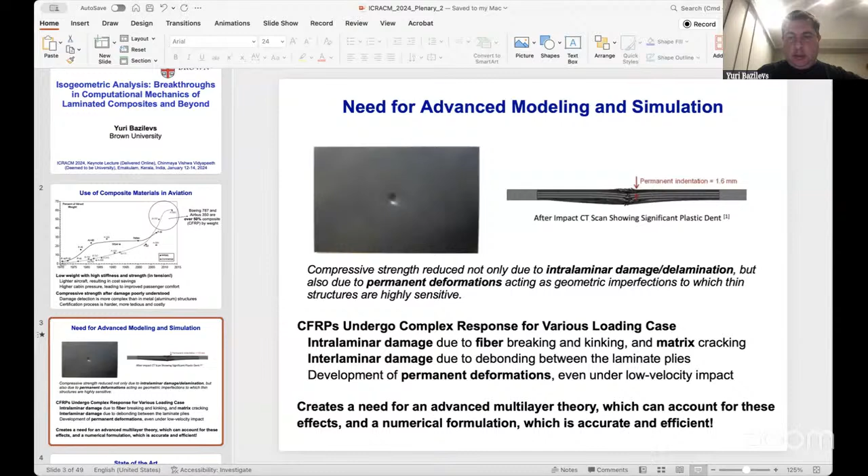Here we go. Okay, this is better. Yes, it is coming. Yeah, you can go. Okay, great.

Okay, so let me go back to this graphic. It's really just to motivate the fact that at this point, over 50% of structural weight of aircraft like a Boeing 787 or Airbus 350 are CFRPs.

So what's so attractive? Of course, we're looking at the low weight, high stiffness ratio, and strength. But in compression, the behavior is a lot more complicated.

So what it does: composite aircraft, you get a lighter aircraft, resulting in cost savings when it comes to fuel use. Another benefit that people really appreciate is that you can have higher cabin pressure, leading to improved passenger comfort.

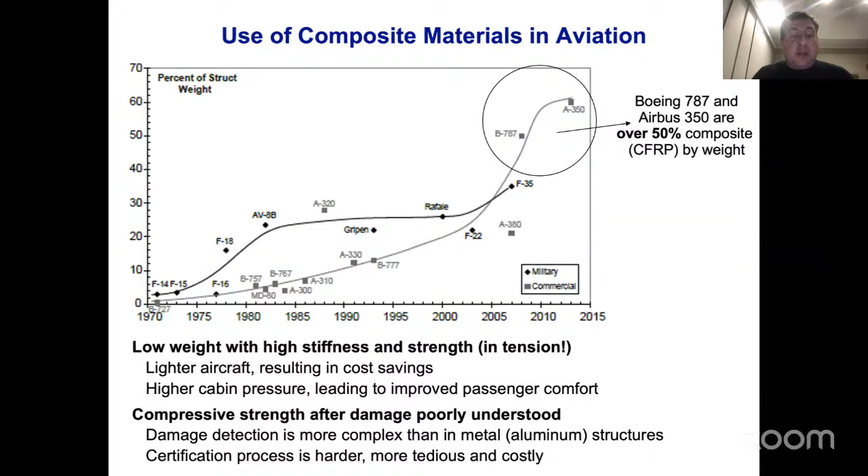However, compressive strength after damage is poorly understood, and as a result, damage detection becomes more complex than in, let's say, metal or aluminum aircraft structures. The certification process itself is harder, more tedious, and costly, and so it does create a need for advanced modeling and simulation for this class of problems.

When we look at CFRPs, they undergo complex response for various loading cases: intralaminar damage due to fiber breaking and kinking, matrix cracking, interlaminar damage or delamination due to debonding between the laminate plies. Another aspect that's perhaps not so appreciated is the development of permanent deformations, a kind of plastic-like response, even under low velocity impact.

So if you look at things like compressive strength, it's reduced not only due to the intralaminar damage or delamination that occurs during impact type events, but also due to permanent deformations that act as geometric imperfections to which thin structures are highly sensitive.

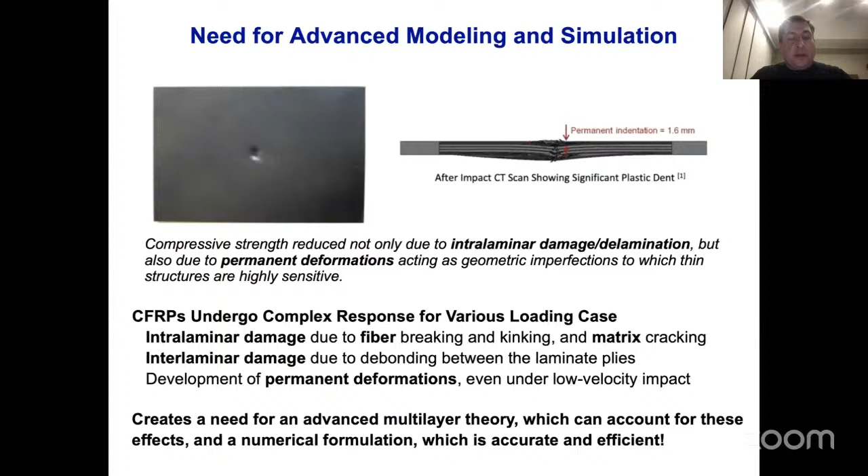So all of this creates a need for an advanced multi-layer theory which can account for these effects, and the corresponding numerical formulation that's accurate and efficient.

So if we focus on the state of the art: typically, a given structure or laminate is broken up into the different lamina. They're connected by cohesive interfaces, and oftentimes, to save costs, you do things like ply grouping.

When it comes to computational approaches, what's prevalent today is the use of finite element methods that either use linear hexes, using the notation of Abaqus type elements, or solid-like shells on each ply. But if you carefully look at this technology, you see that these are susceptible to what's called transverse shear locking, especially in the thin shell limit, where each ply becomes very thin.

You get fairly inaccurate stresses due to lower order approximation that's involved. These are only piecewise linear finite elements, so you get stresses that are only constant on each individual element.

In explicit calculations, which are often done for impact events, you get small time step sizes, coming from stable time step restrictions because of high stiffness and low mass. Also, when you start looking at curved structures, you need high element count just to represent the curved geometry and resolve the stresses in these regions.

So even if you want to do an impact on a coupon consisting of 8 to 16, perhaps 24 plies, you're looking at meshes that are on the order of 500,000 to 1 million nodes. Imagine 3 displacement degrees of freedom at each node, and you're looking at something that's 3 million for a simple coupon just to get things right.

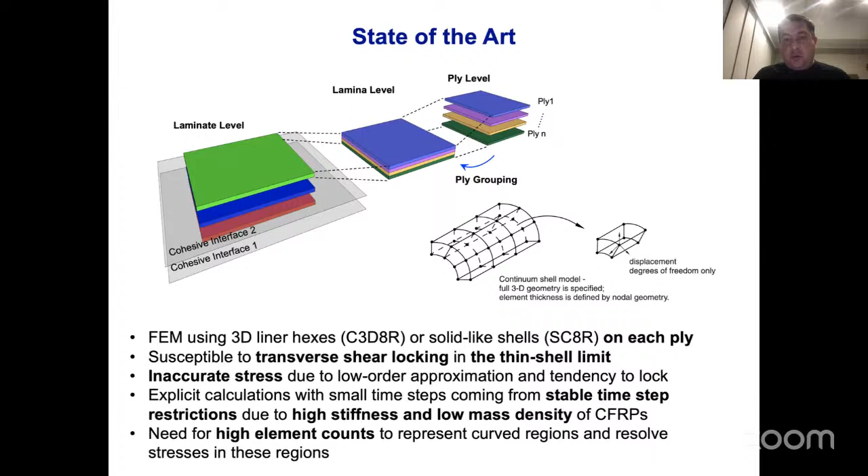This is something that we proposed a few years ago, Professor Hughes and another colleague at the University of Texas. The first paper appeared in the fall of 2005. The underlying technology is based on technologies like NURBS, T-splines coming from computational geometry. And so what we call the resulting modeling methodology is isogeometric analysis, coming from the Greek word iso, meaning equal, and geometry.

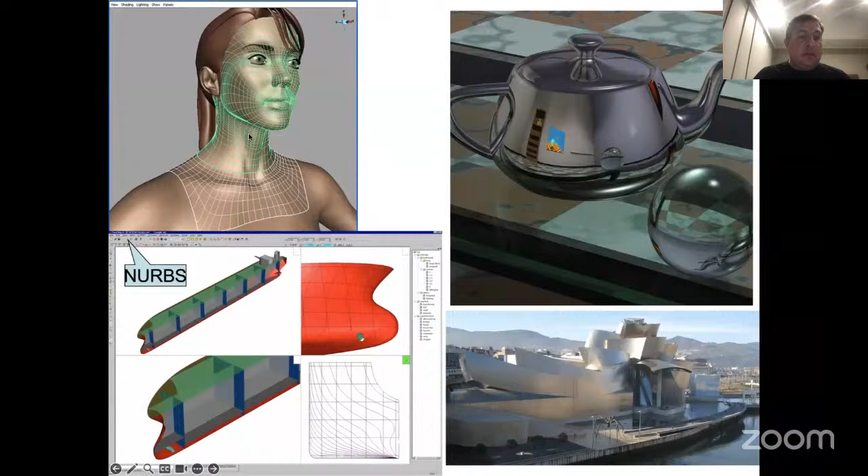So what do we mean? We take the objects that are represented like this in CAD systems using splines, and we're using the exact same spline functions to represent solutions over these objects, for things like displacement fields, temperature fields, and so forth.

So one way to think about isogeometric analysis is you have exact geometry as defined by your CAD system, where you design these objects, in combination with the isoparametric concept of FEM, meaning you're going to use the same functional description for geometry and for the solution field designed over that geometry.

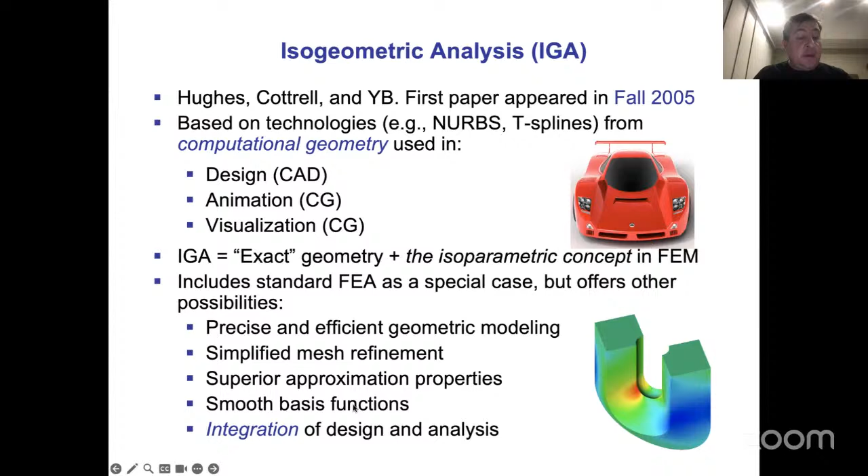Isogeometric analysis includes standard finite elements as a special case, but it offers exciting possibilities, such as precise and efficient geometry modeling, simplified mesh refinement, very nice approximation properties, and basis functions that are smooth between the elements, which we're going to take advantage of. And the community works towards integrating design and analysis.

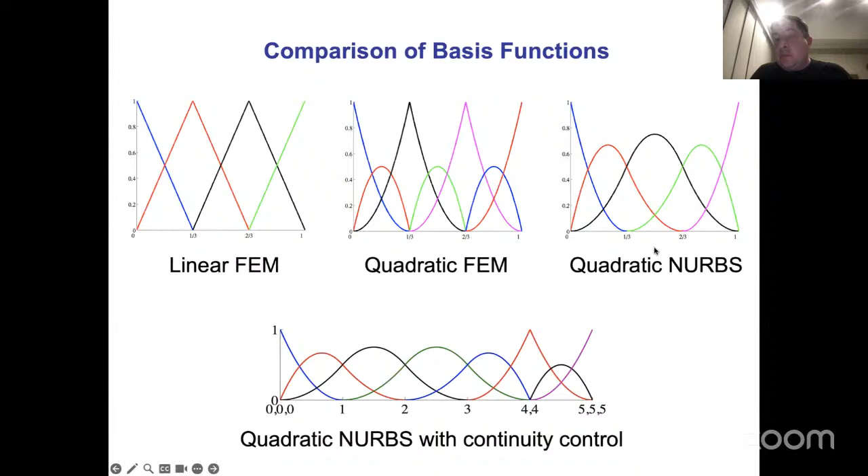Now what you also can do is bring in objects—all the conic sections like circles, cylinders, and so forth. For example, it takes 3 nodes, or what we call control points, to represent a piece of a circular arc of arbitrary angle.

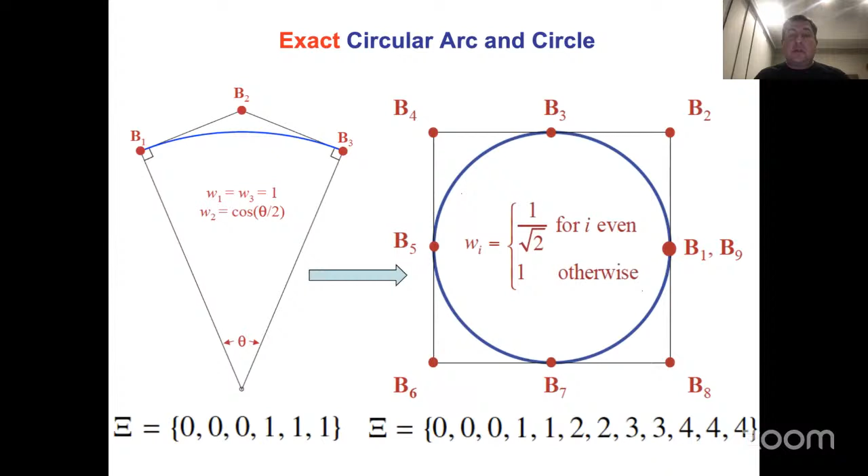And if you want a complete circle, all you need is 8 nodes to represent it. Imagine how many linear elements you would need to get the same accuracy in geometry representation. So I think there are real benefits to be had in computational analysis.

Now when you think of CAD, there's a lot of very well-developed surface technology—you can very quickly build complicated surfaces. As a result, in advances in computational mechanics, isogeometric analysis has impacted many different areas: solids, fluids, electromagnetics, and so forth. There's been quite a bit of new work, I'd even say a renaissance, occurring in the field of shells.

This is what I'd like to take advantage of for composite materials applications. So let me briefly take you through some of our recent work on Kirchhoff shells, which forms the basis of what I'll show you later. Here we imagine structures much thinner in 1 dimension than in the remaining 2, and representation of such a structure can be obtained as follows.

You get a structural mid-surface, which is given here, and then you parametrize the mid-surface. Then you extend it in the thickness direction by h, halfway up and halfway down, in the direction of the normal, which you compute directly from the representation of your surface.

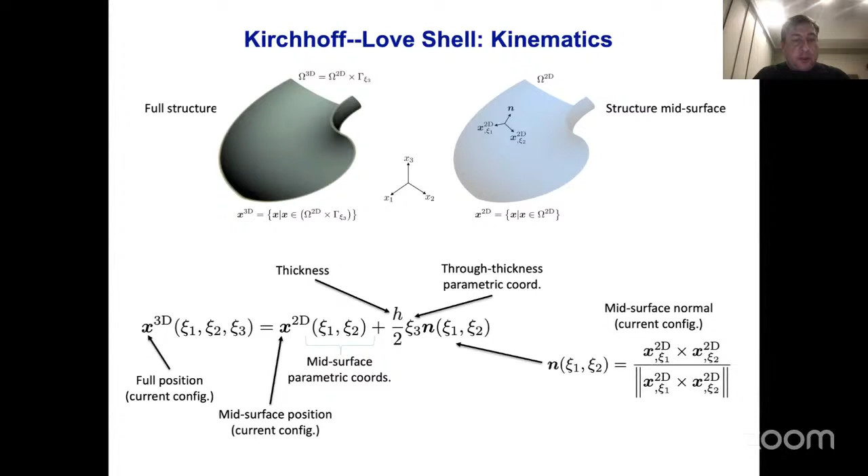So the entire 3-dimensional object's parametrization makes use only of the parametrization of the mid-surface and the position vector on the mid-surface. You can think of this as a parametrization, but also as a current configuration of your structure as it moves through space during a deformation process. Now that you have that description, you can think about mechanical analysis.

You can think of computing stresses, for example, from a given constitutive relationship. There you use a measure of deformation, a strain rate. How do you compute a strain rate? You need to take a velocity field, take its gradient with respect to current position, and symmetrize it. Look at the definition of the spatial velocity gradient, which is given here.

You can decompose it into two parts by applying the product rule: it's a parametric gradient of the velocity multiplied by the inverse of the parametric gradient of the position. This is where you hook up with the Kirchhoff shell, using the expression derived in the previous slide to get the parametric gradient of the position.

So you can expand it here, and you end up getting a parametric gradient of the mid-surface. You need to differentiate through the normal vector, and the normal vector is defined here, so you start looking at second derivatives now. This is sort of a price to pay—you can't use traditional finite elements, but you need functions that have second derivatives.

Like splines. Then you can develop a velocity vector by taking a Lagrangian time derivative of the position, and again you have the velocity of the mid-surface and the rate of change of the normal. Once you have the expression for the velocity, you can develop its parametric gradients, and now you have a complete description of the strain rate, consistent with the Kirchhoff-Love shell theory.

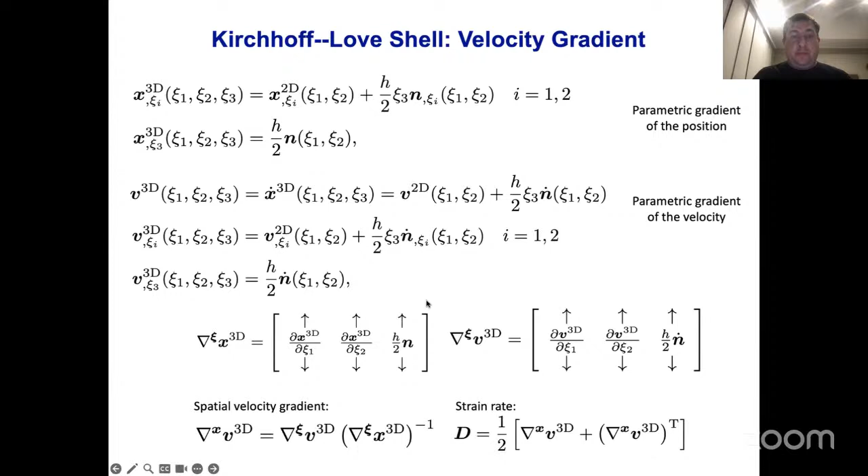The rest of the formulation looks like what you would do in traditional finite elements. You use a principle of virtual work, principle of virtual power. These are the acceleration terms, these are the stress terms, these are the body forces and surface tractions. For your accelerations and virtual velocities, or test functions, you employ expressions consistent with the Kirchhoff-Love theory. So it's really a full three-dimensional solid formulation where the kinematics is restricted to Kirchhoff shells.

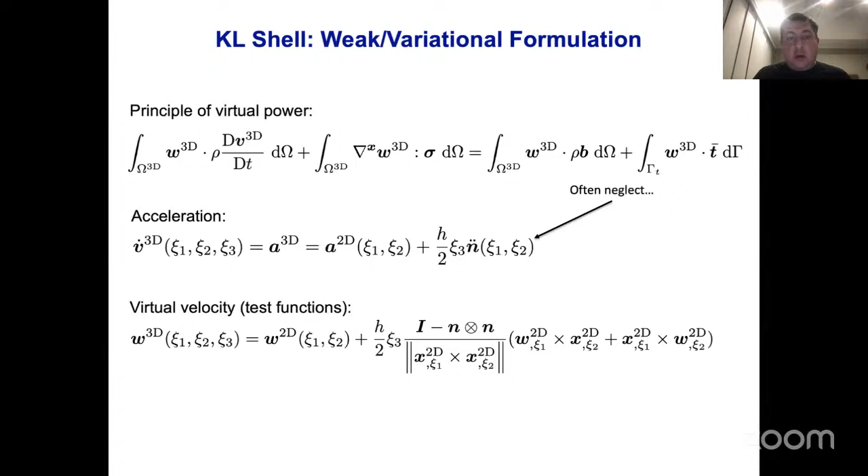Now you go from the continuous to the discrete by using spline functions like B-splines, NURBS, or unstructured variants like T-splines. You parameterize the mid-surface in the current configuration, compute the velocity, and introduce these expressions into the weak form you developed here. You end up with a standard Galerkin approach of finite elements, recognizing the acceleration terms, body forces, surface tractions, and nodal forces coming from the internal stress terms. Sigma here is the Cauchy stress, and B is this velocity gradient or strain displacement matrix that you see in traditional finite elements, but again consistent with the Kirchhoff-Love theory.

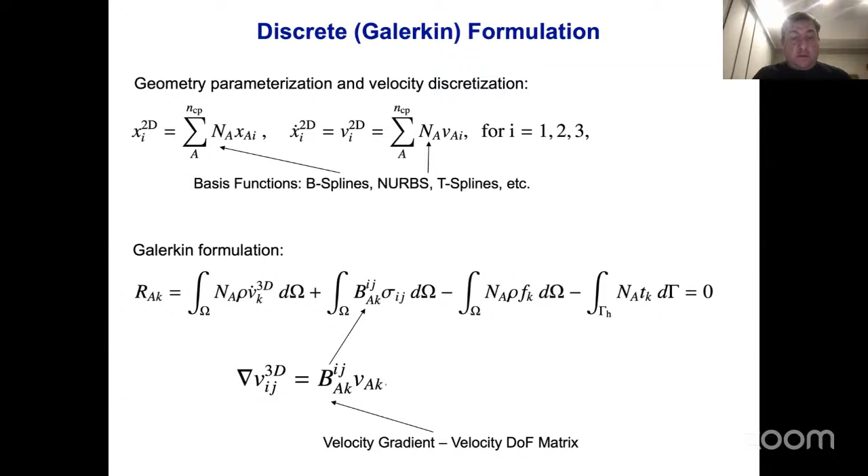If you look at this slide, the expression for the strain displacement matrix looks absolutely unpalatable, but you derive it once and for all, you program it, and you have a method.

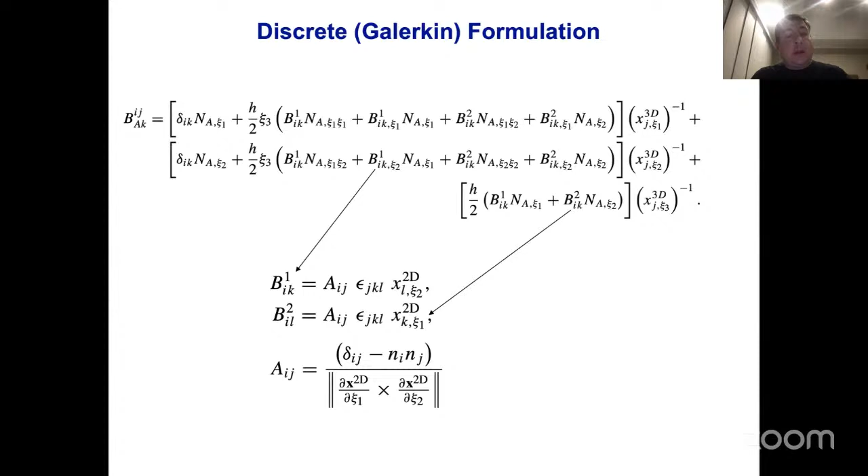So let's see how this works. We're going to take a square tube and crush it. You see that it collapses in the accordion mode. Most of the plasticity occurs right at this edge here, at the right angle, and you can see that the accordion mode is similar to what you see in the experiments.

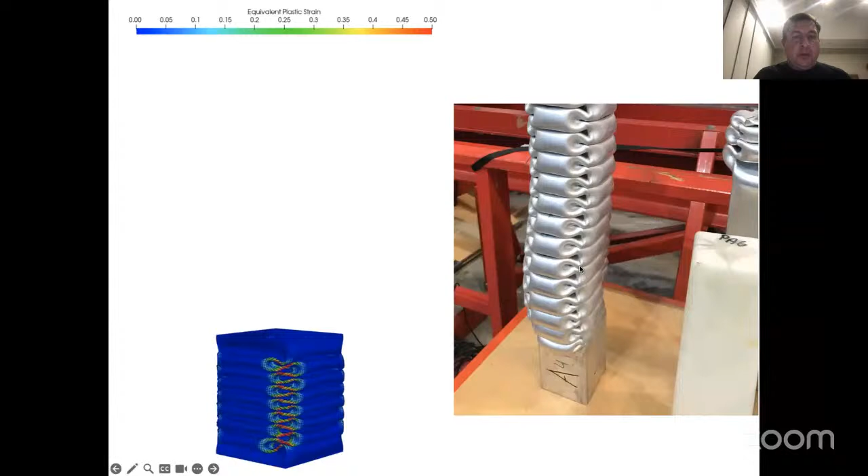This is another problem we did. We took a soda can, measured it—it's very thin, the thickness is a fraction of a millimeter. Problems like this drive commercial solvers crazy, and we're going to crush it and twist it at the same time at a very high rate.

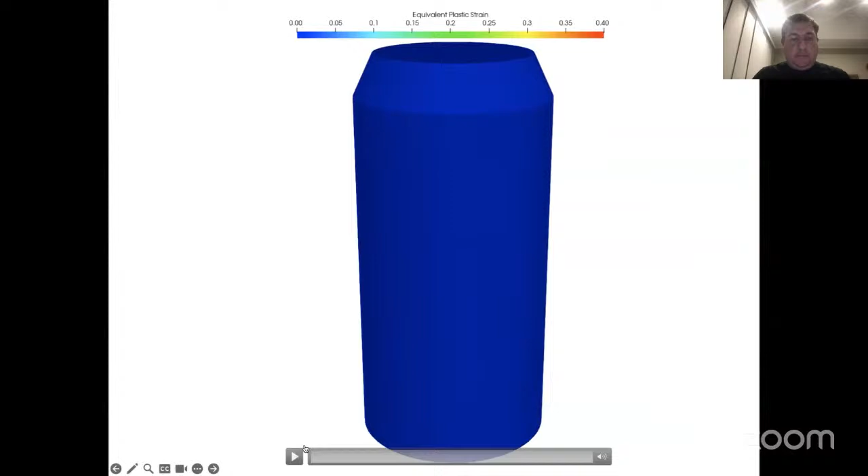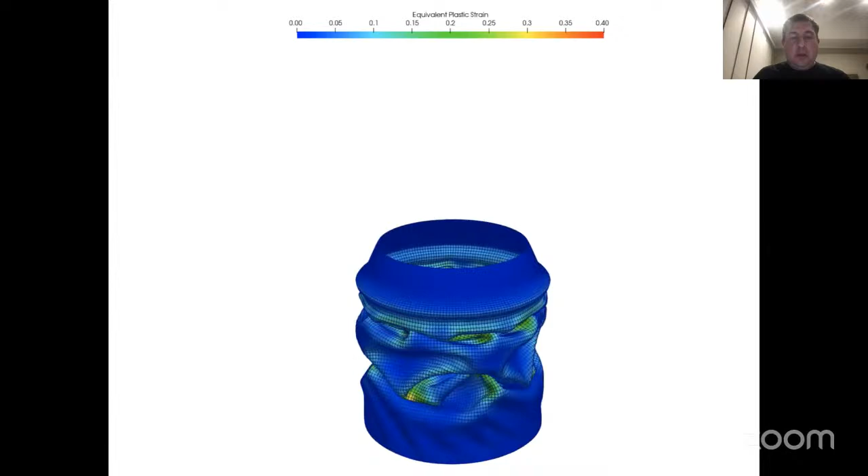Here's the response. You see immediately formation of the plastic zones—this is effective plastic strain. You can actually see the formation of these plastic buckles in these very sharp corners. Then you can continue the calculation for very, very large strains, and the calculations don't blow up. So this is the kind of robustness and accuracy you can get out of doing these problems using spline-like discretizations as opposed to traditional finite elements.

What I'm showing you here are not my results—these are results from a paper by Kendrick Shepherd, presented at the SIAM International Meshing Roundtable in 2023, where isogeometric spline technology was used to carry out a car crash analysis of the body in white of the 1996 Dodge Neon.

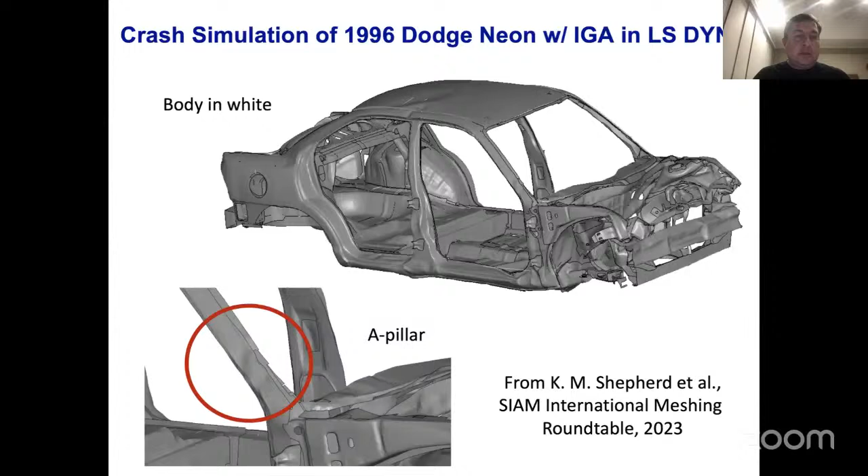So this technology is making its way into commercial software like LS-DYNA, and is really of great interest to the automotive industry. Okay, so now let me move on to the composites part.

And so what we did here, we essentially took the formulation for the shell, and what we'd like to do now is extend it to a multi-layer theory.

The goal here is to represent multiple layers of the laminate and account for the most common failure modes of laminated composites. We'd also like to develop a framework that's an alternative to finite elements that is more accurate per degree of freedom, more efficient, and thus can take you from coupon level simulations to at least being able to handle structural components.

The idea is to use the Kirchhoff-Love theory to represent individual plies or ply groups. These structures, the individual plies, are truly thin. There is really no need to introduce transverse shear strains—there's no transverse shear stresses.

We feel isogeometric methods are perfectly suited for this application because the definition of structural surfaces can be obtained directly from CAD. You get computational efficiency because you only get displacement degrees of freedom on each individual ply—no rotational degrees of freedom, no possibility of transverse shear locking because there is no transverse shear. You get geometric exactness on the coarse mesh and a natural integration with CAD systems.

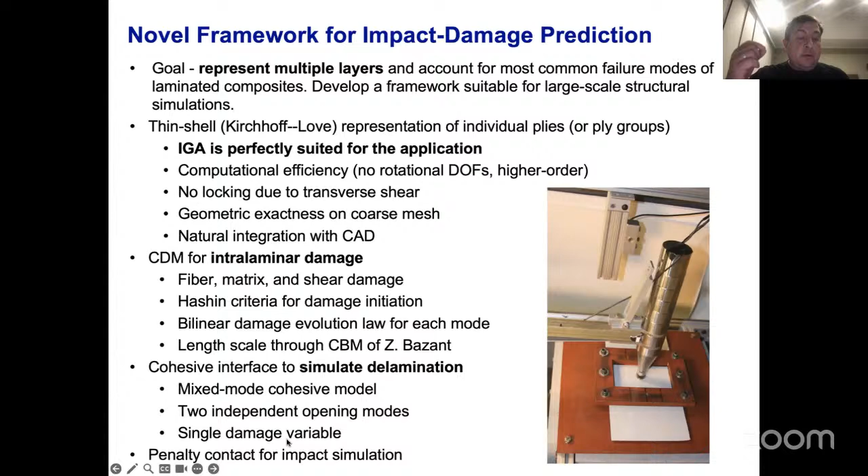In particular, we've developed a mixed mode cohesive model where we take two independent opening modes, but a single damage variable representing delamination. So let me take us through some of the modeling details, some of which are fairly traditional and some of which are new.

First, to model plasticity, we work with the effective Cauchy stress in the corotational system. The corotational system involves the use of a rotation matrix, associated with a polar decomposition of the deformation gradient, which means it will rotate with the material axis. The key is that it's initialized using the principal material axis.

So at every integration point or material point, wherever I need the stress, the rotation matrix is initialized pointing in the direction of fiber, matrix, and through-thickness direction, and then it's advanced in time using an appropriate algorithm. With this technique, you get incremental objectivity for large deformations and anisotropy at the same time.

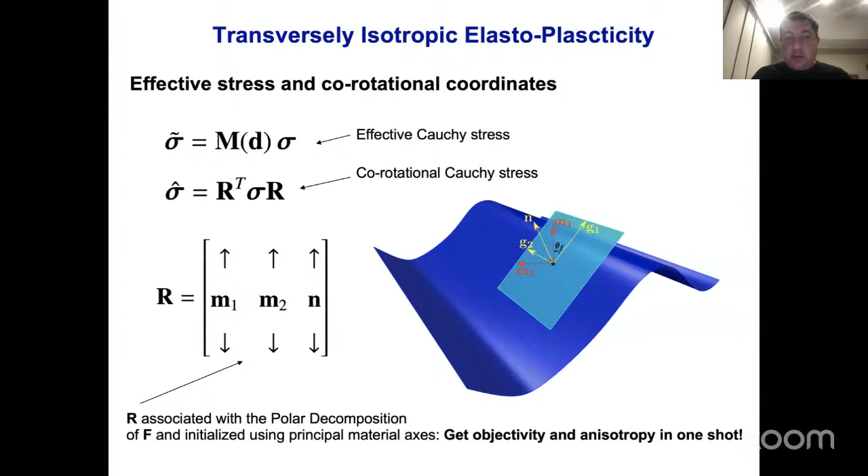In this principal coordinate system, we define a corotational strain rate. We use the rate form of the stress equation, where dP is the plastic strain in the corotational coordinates.

Here's a definition of a yield surface—it uses a plastic potential expressed in this matrix format. P is the projection tensor, where you can clearly see we're only taking into account stresses in the matrix direction and shears. So we're assuming no plasticity occurs in the direction of the fiber, and we use power law hardening, which is common for epoxy type materials.

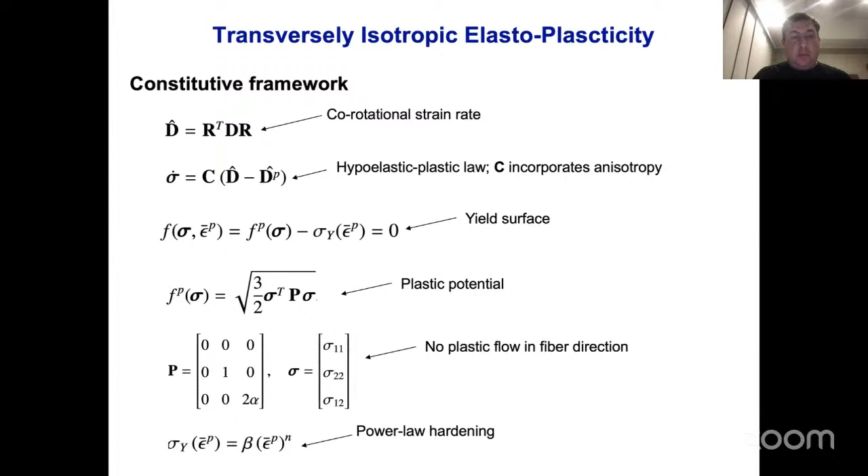On top of that, we're applying continuum damage mechanics—this is the damage operator. We use, as I mentioned, Hashin's criteria for damage initiation. We have four modes: compressive and tensile fiber failure function, and tensile and compressive matrix failure function.

We track the modes individually using a bilinear law, linear softening. Then we convert the damage indices into the damage variables associated with fiber, matrix, and shear. We use a little bit of viscous regularization to improve the overall performance of the nonlinear convergence of these procedures.

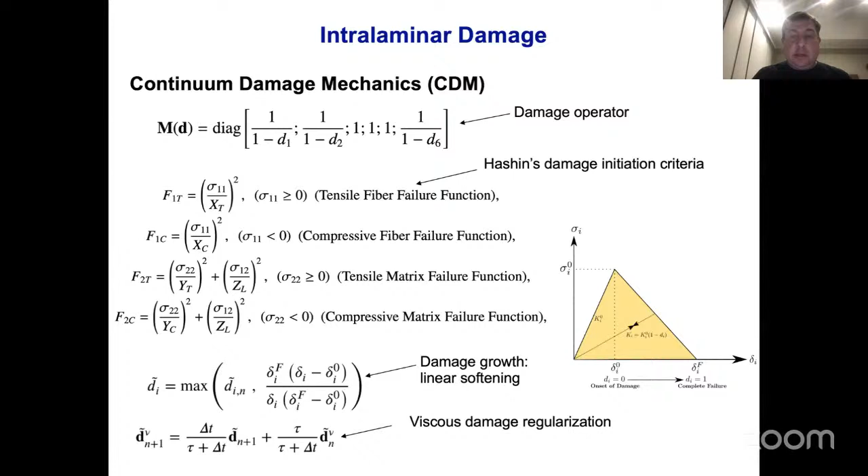To simulate delamination, what we do is add a term like this to our overall formulation connecting all the plies. Delta here is a displacement jump, or what's known as a separation, between the different plies. That defines a traction-separation relationship that takes in the separation.

It's multiplied by a stiffness tensor, which makes use of different stiffness values in the normal and tangential directions, and it's multiplied by 1 minus d cohesive, where d is a cohesive damage variable. The damage variable evolves according to a mixed mode cohesive damage law.

The key thing here is that the displacement jump, or separation, and its variation makes use of a definition that respects the kinematics of the Kirchhoff shells. So we look at the two adjacent plies, go to the mid-surface positions in the current configuration, then extend those to the boundary using the normal vector on each ply and half of the thickness. The difference between these two quantities gives me the displacement jump. Again, the key idea is that your displacement jump respects the kinematics of the Kirchhoff shell.

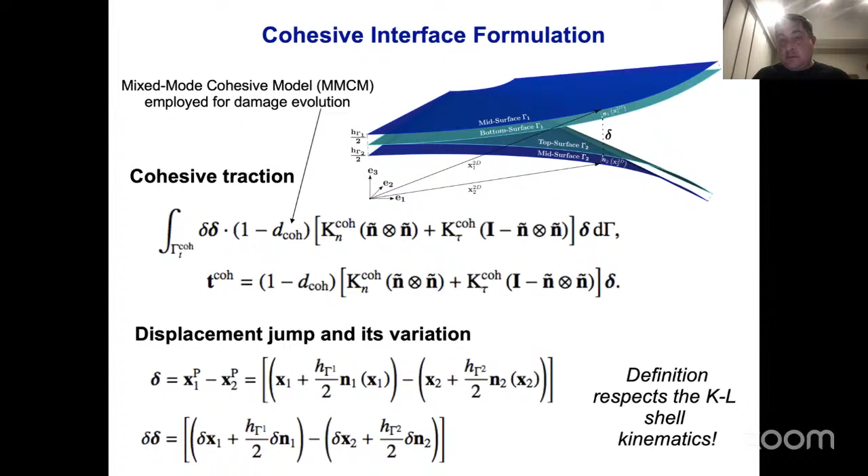One of the natural questions the composites community always asks is about laminates that are thick. Each individual ply is very thin, so there's no reason to say there's a significant amount of transverse shear, but when you put all the plies together you get a thick laminate, and transverse shear plays an important role.

To understand what's going on, we basically build up a plate like this, where we keep the thickness constant and use more and more layers to represent that plate. With each definition, the layers get thinner and thinner, but their sum total is the same. These layers are connected with cohesive interfaces where the cohesive stiffness parameters can be computed to be consistent with the behavior of a solid.

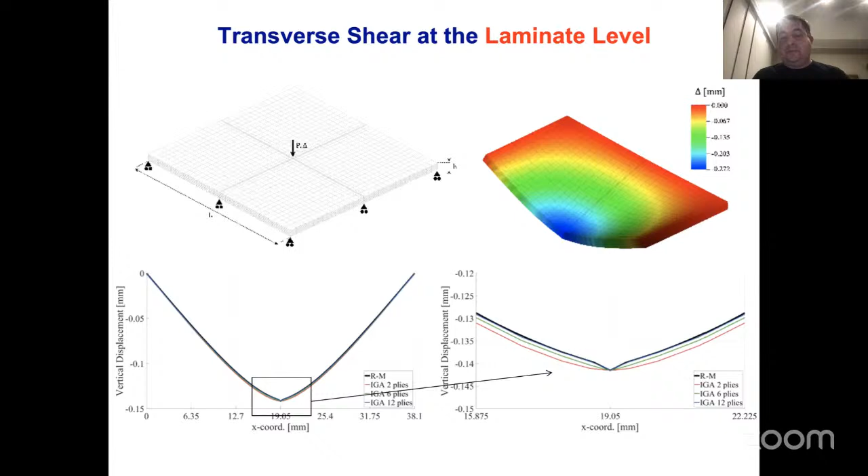Very good. Finally, when it comes to impact and dynamic problems, suppose you have delamination between the two plies. When the plies separate, you don't want to introduce any traction—you want them to separate freely. But then when the plies move toward each other, you don't want them to interpenetrate. So of course, the natural choice is to use the cohesive stiffness in the normal direction to preclude the interpenetration of the plies.

What happens in this case is as you switch from opening to closing, the local stiffness changes. So when it comes to implicit procedures, these become very hard to converge, because in a highly dynamic event where the plies are chattering, you go from opening to closing repeatedly. Your stiffness changes locally and it drives your Newton solvers crazy.

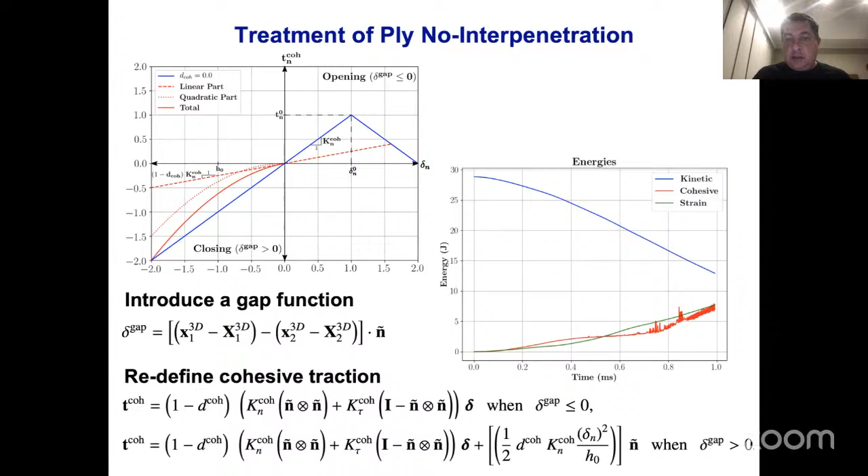Okay, let me take you through some experimental validation. This is a flat panel impact, a famous paper from Rivallant, 2013. This is an 8-ply case with lamination sequence: 0 repeated twice, 45 repeated twice, negative 45 twice, 90 twice, symmetrized. The plies with the same fiber orientation are grouped together. We impact them at 2 different energy levels, 6.5 and 25 joules.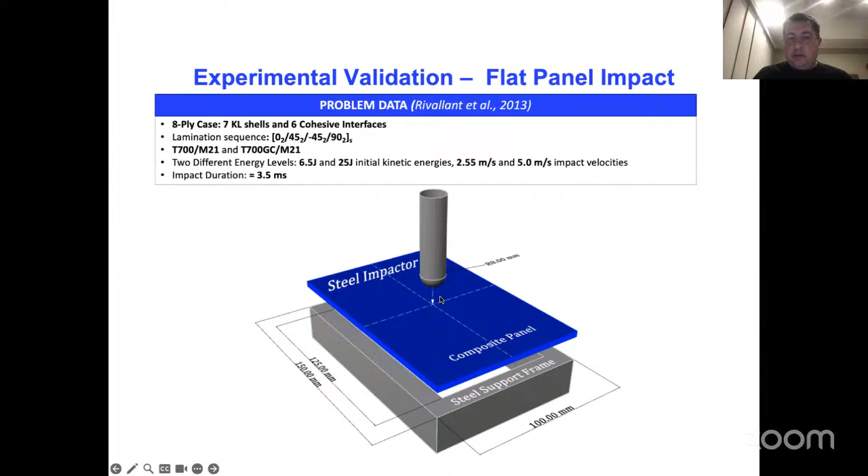The impact duration is about 3.5 milliseconds. Here's a frame showing our composite panel and the impactor. Here's the matrix damage: on top is the higher energy impact, and on the bottom is the lower energy impact.

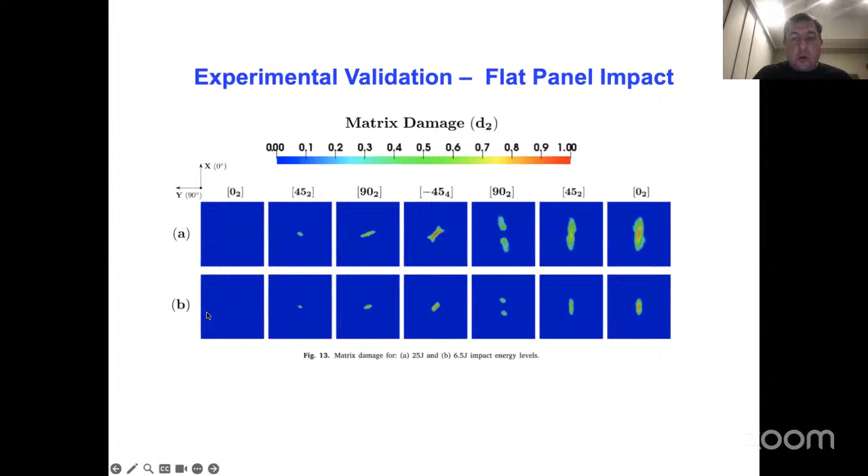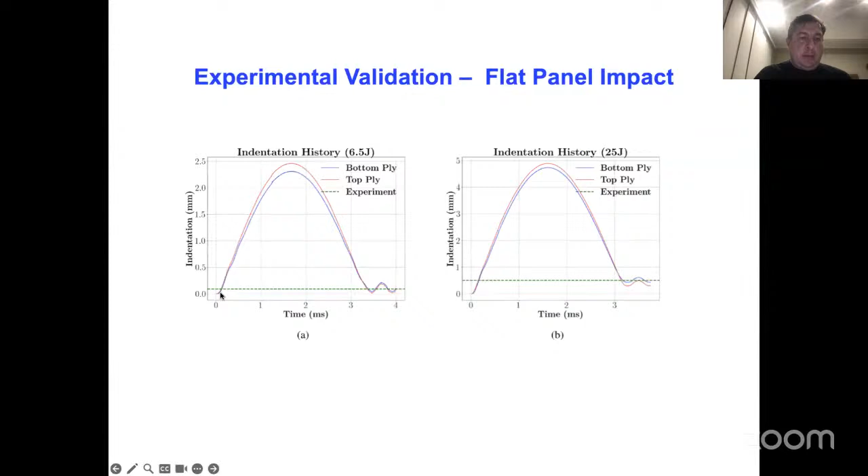Now, on this plot I'm showing a history of the displacement. We take a point on the top ply and the bottom ply directly under the impactor, and plot the displacement at that point as a function of time. You can see the displacement ramps up as the impactor drops down. At maximum displacement, the impactor turns around and gets bounced off the structure. The displacement goes back toward 0, but instead of going directly to 0, it oscillates around a non-zero value.

That non-zero value is exactly the size of the dent measured experimentally. That's the plasticity effect - we're able to capture not just the force histories, but the size of the dent because of the plastic formulation. The same holds for the 25 joule case: much higher displacements, and they come back at the end of the impact, again oscillating around an experimentally measured 0.5 millimeter dent on the plate.

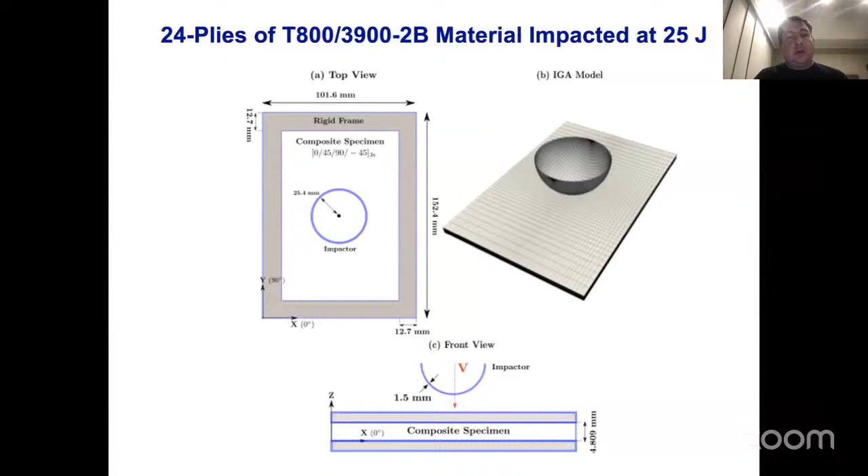Here's a different problem: a 25 joule impact. In this case, the composite specimen actually has 24 plies, which is starting to get quite expensive for traditional finite element simulations. These impact tests were done at the University of California San Diego by my former colleague, Hyonny Kim, and they were able to measure delaminations through CT scanning.

So here we're comparing the delamination patterns at 23 interfaces to the CT scans, and what you see is that the extent and relative magnitudes in many instances compare quite well. We're very happy with these results.

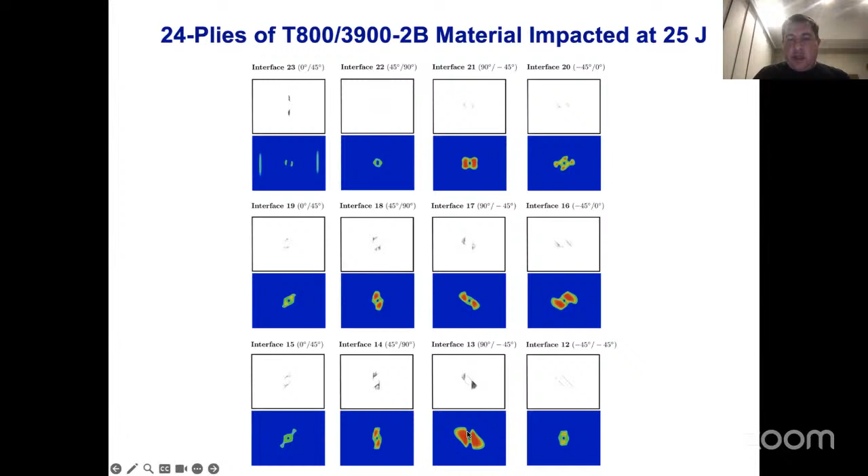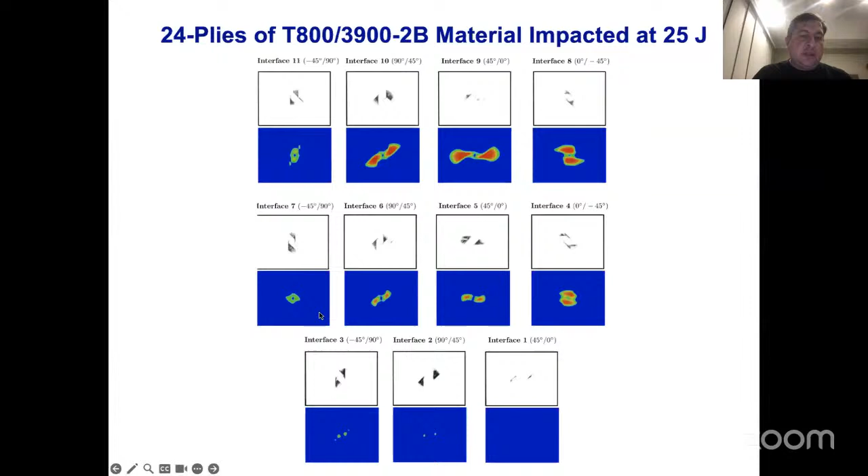You go to interface 11, 10, etc., all the way to the end, and again we're not seeing as much delamination on the rear, the very last interfaces, as we should. But everywhere else, the agreement between what you see on a CT scan and what we predict in the calculation is quite good.

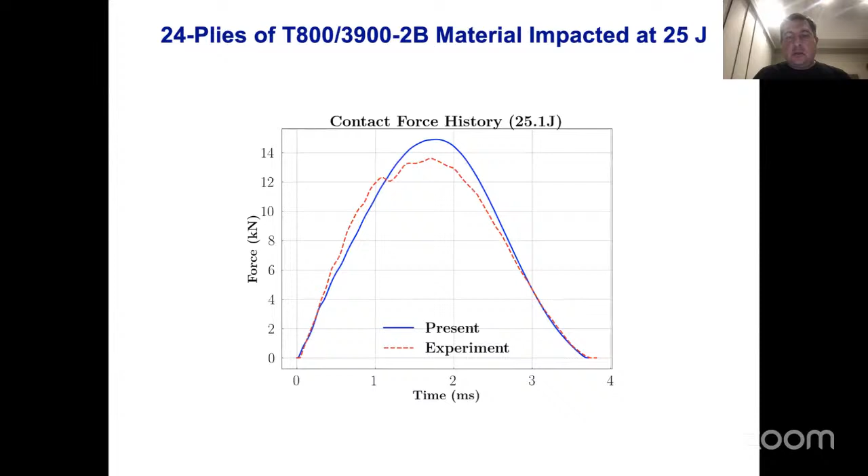Here is a contact force history, and the matching is okay. No data on the dents were reported in this case.

The final impact example I want to show you is an impact on a stiffened composite panel at 50 joules. You have the plate or panel, and the stiffener sitting on top, which has 16 layers of CFRP. The geometry is given here, so we're not just looking at a flat structure - we're looking at a curved structure.

The radii of curvature are given and are exactly represented through these spline or NURBS type functions. So we have a full 16-layer model of the stiffener, but the plate itself is modeled basically as a single Kirchhoff shell, because we don't expect any significant delaminations there.

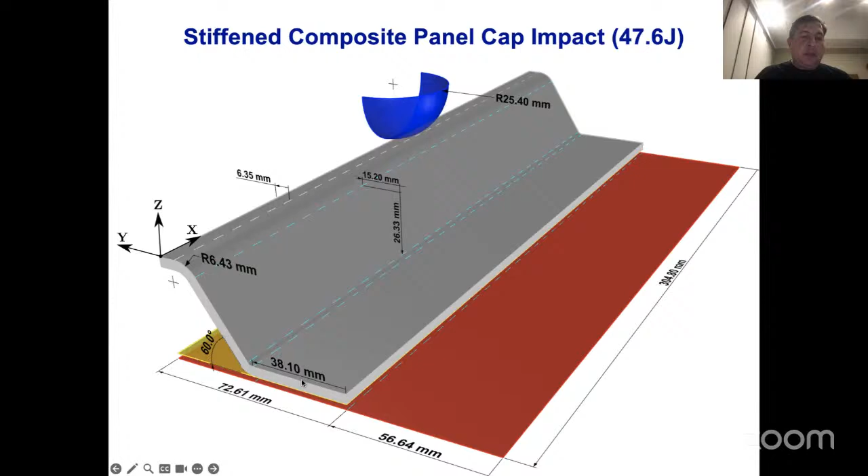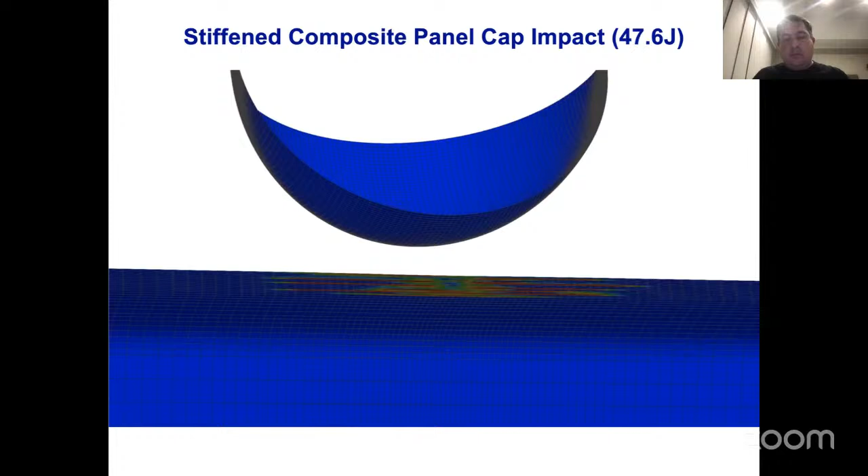So here's the view from the side. You can see the impactor that's descending on the stiffener. Let me play this again, and you see the onset and growth of delaminations between the different plies. In some cases, the extent of the delamination is quite large, but at some interfaces you hardly see any. That behavior depends on what fiber orientations are stacked on what fiber orientations. So here's the same movie playing again.

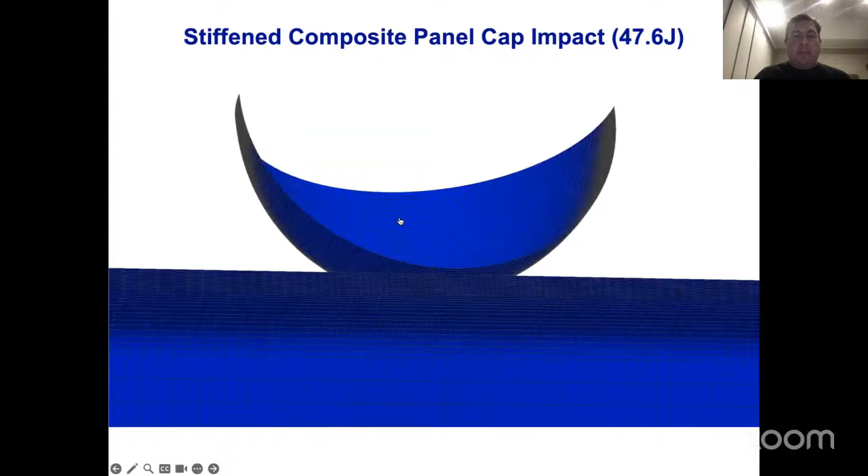In this case, you can see all the action takes place away from the boundaries, so because the problem is less sensitive, we can actually capture the forces much better. Our experimental colleagues also reported indentation size, and it looks like we're capturing that pretty well too, which is very good.

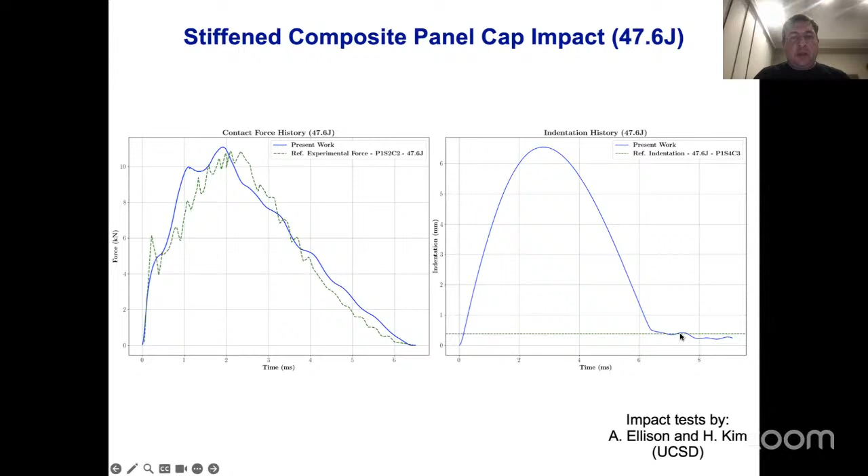Here, our experimental colleagues are showing the extent of the delaminations that they are able to capture through CT scanning, and it's about 80 to 96 millimeters. In our calculations, we're getting almost 80 millimeters. So here, what we're doing is taking all the contours of the cohesive damage variable and plotting it on each interface, getting this nice composite image. You can see that the delaminations are curving very nicely around the curved interfaces.

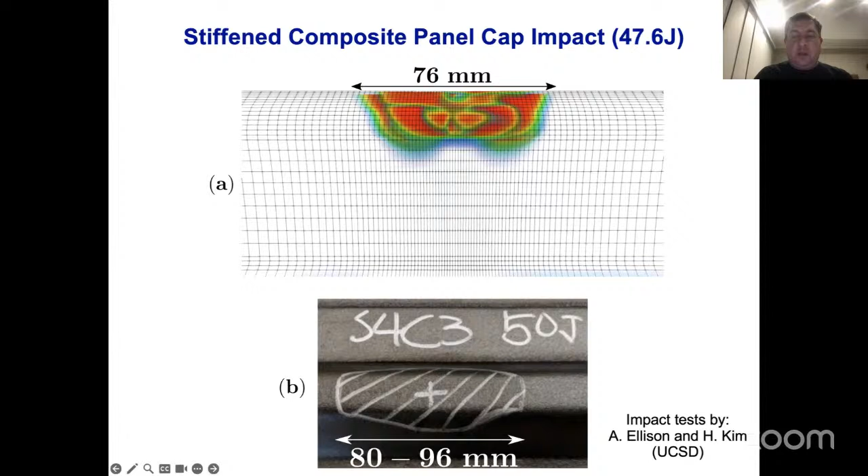So in the remaining few minutes, let me conclude with our more recent effort. In the introduction it was mentioned that I'm a director of the Mechanics of Undersea Science and Engineering Center, and one of the central undersea problems is how undersea vehicles and platforms respond to underwater explosions, what the community calls UNDEX. There's also interest in composite materials, especially for unmanned undersea vehicles. The US Navy is interested in how composite structures respond to extreme events like this.

So we started to develop a framework, a fully coupled fluid structure interaction framework. It's a presentation in itself and there's no time to go into details, so I just want to focus on the composite side. It's a fairly complicated problem where you have to model a multi-phase fluid, keeping track of water, explosive gas products, and air. We want to be flexible and handle a variety of structures. In this case, I'll show results using the multi-layer isogeometric Kirchhoff shell theory, but we do other things too. The challenge is that you have many interfaces in this problem.

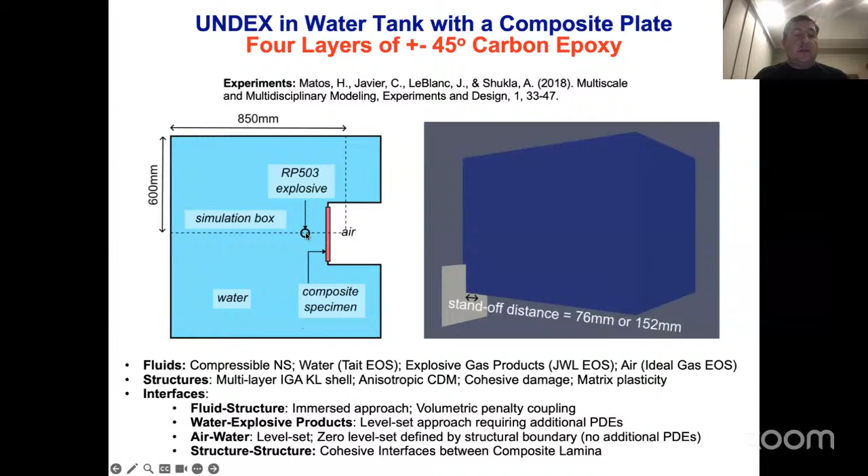We have very good collaborators again, just down the road from Brown University, 30-40 minutes away. At the University of Rhode Island, a group led by Arun Shukla is doing really cutting-edge experiments on undersea explosions using a water tank facility they designed in their lab. Here's a calculation of a composite plate - this is a quarter of the volumetric domain filled with water, with a charge here. These are not full scale, these are lab scale experiments, so the standoff is 76 millimeters, even less than 10 centimeters. These are fairly small structures.

So here's the calculation. We're setting off a charge, and you see this very fast shock wave that goes through water, impacts the structure, which becomes very dynamic.

And then you see a very slow growth of the explosive bubble, okay? And that explosive bubble continues to interact and deform the structure. And then the process continues because that bubble collapses and then it re-expands again. So you have this very wide range of timescales that you need to track in the problem.

The water shock, the shock in water, travels on the order of microseconds. While the expansion and collapse of the bubble is milliseconds. So there's 10 to the 3, 10 to the 4 orders of magnitude of time scales that you need to handle. This is the biggest challenge in these calculations.

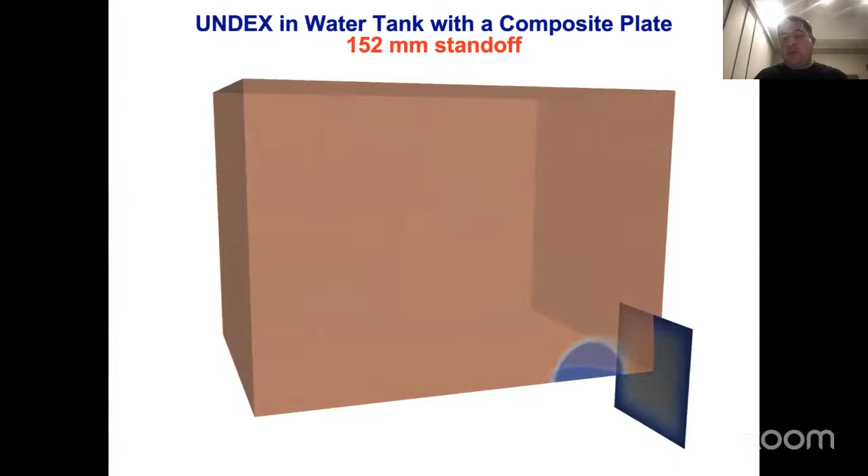That's a standoff at twice the distance, 152 millimeters. Again, you can see the fluid mechanics, the explosive bubble, and the structure interacting in a very dynamic way. So that composite plate actually had 4 layers shown here, and 3 cohesive interfaces.

What I'll show you is a movie that shows the time history of cohesive damage and fiber damage, with a 76 millimeter standoff. What you see is that cohesive damage occurs first. Then the different lamina start to basically act in an independent fashion. They can't support as much load, and you start seeing the formation of fiber fractures here. These are plus minus 45 plates, and you can actually see that pattern of plus minus 45 fiber fractures.

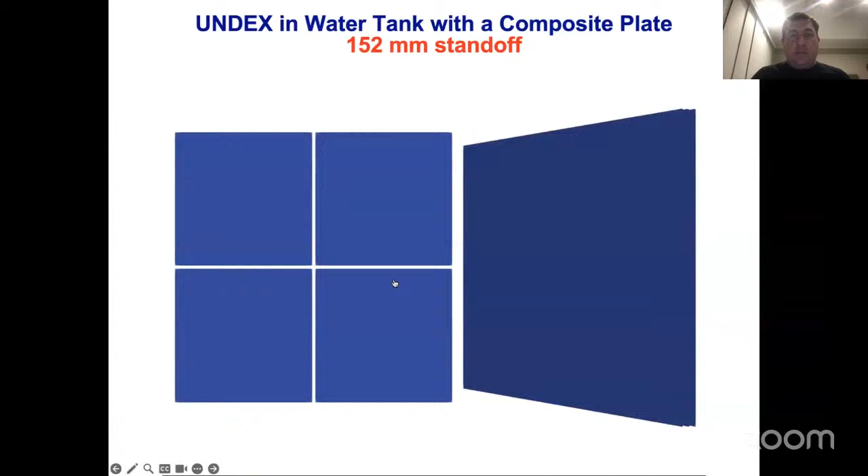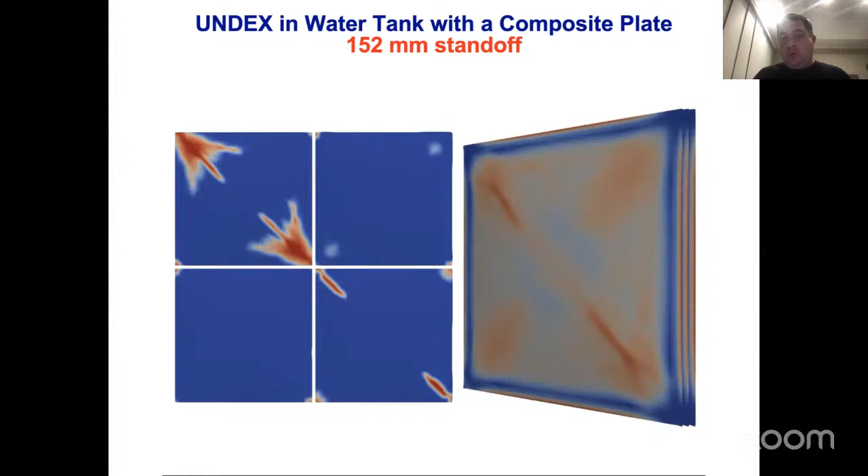This is 152 millimeter standoff. Again, delamination starts from the corners. Once enough delamination happens, then the fractures start. That's a behavior that our experimental group is observing, but it's kind of hard to do this with optical type techniques underwater. So our high fidelity FSI tools with composite damage are actually able to capture this.

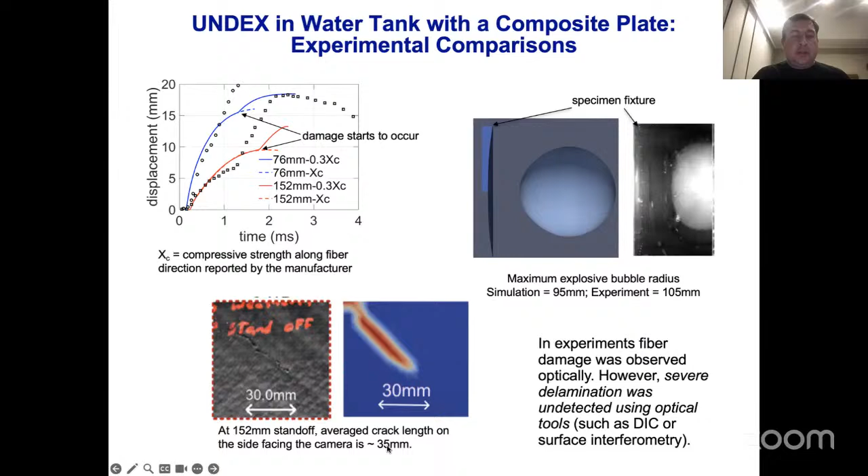If we choose the right value of the compressive strength, we can actually induce the fiber fractures I'm talking about. Once you induce the fiber fractures, you can have the second sort of burst of the displacement. So the only way to capture it is by inducing fractures. And if we look at the predicted size of the cracks in the calculations and in the experiments, about 30 millimeters. So we're quite happy about that.